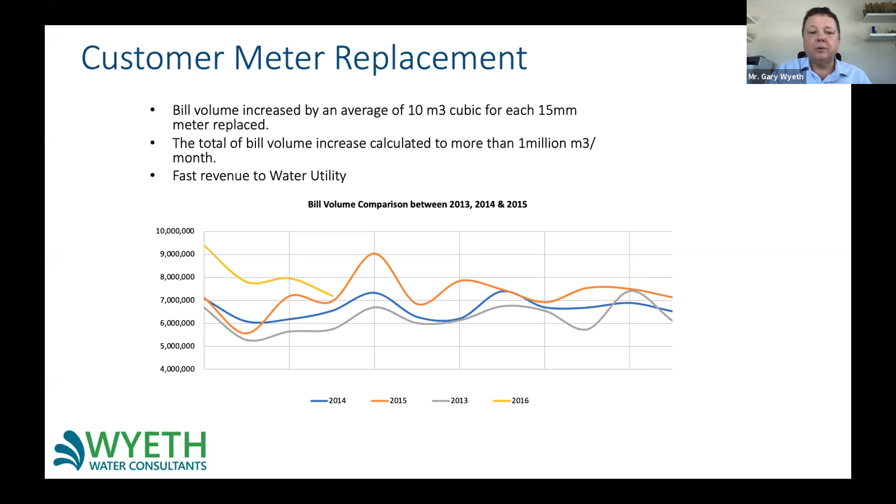This is actually a contract that was undertaken in Malaysia for one of the utilities. You can see here that the revenues on a year-to-year basis are actually increasing, from 2013 up to 2014, 2015 up to 2016. This increase, going on a year-by-year basis, was actually down to customer meter replacement. So those customer meters that were being replaced were actually seeing an increase in revenue going to the water utility.

Now that increase in revenue is something we're looking at because it's often what we call the virtuous cycle. As our revenues increase, we can spend more of that money. So that increased revenue can be used to invest in further NRW programs, maybe pressure management, maybe protection, or even more meter replacements. And that will help to reduce the NRW even further, which will then give us more revenue or decreased operational costs, which will then improve the water utility's revenues and profits.

That's what happens, utilities work in this circle and they gradually improve, which is why a lot of non-revenue water programs take a long term - they can be 10, 15, 20 years. Utilities like Selangor have been doing non-revenue water for over 20 years. Johor is 15 years, that's been ongoing and they're still working at it now. So this is something that's not going to happen quickly.

Now, the issue that we have with holistic programs is that often they can only be limited in length, maybe 3, 4, 5 years. So because we're looking at that longer period, it is the utility that needs to take over once the shorter holistic program has finished.

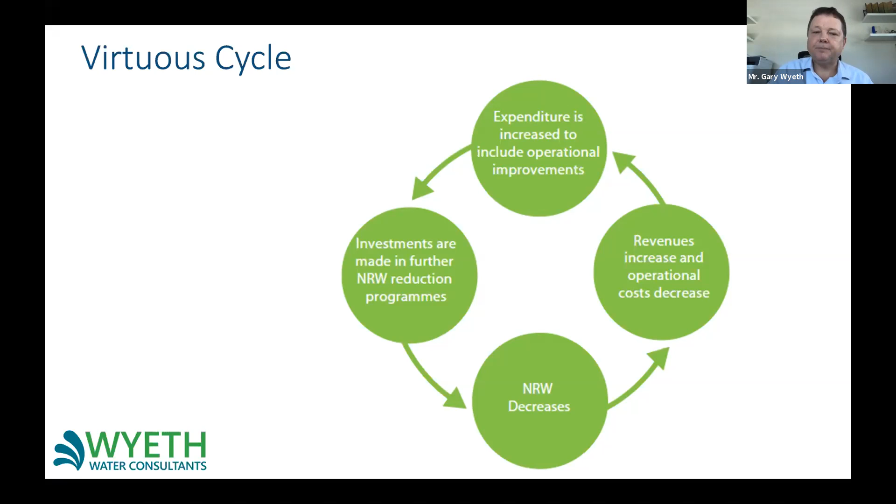So this means that the government, either at a state level or a federal level, has to subsidize these utilities to be able to cover their costs. Now this can be done for political reasons, because you want to keep the people happy, or you don't want to increase the water rates too high. But if that's the case, there needs to be a fixed subsidy so that the water utilities know exactly what they're going to be getting on top of the revenues from their metering.

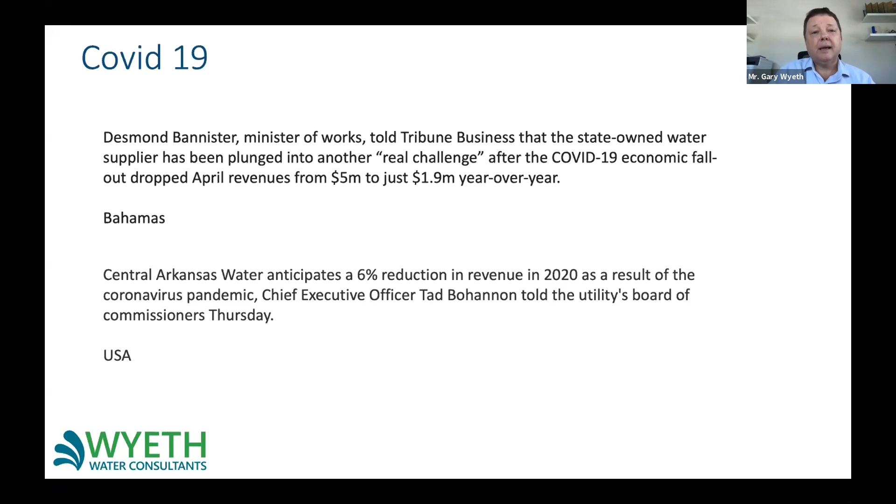So what's going to happen there? Are the governments going to have to subsidize that loss that's happened over that period of lockdown? And how do the governments actually work out roughly how much it is? Or do the utilities have to start looking at cost saving measures? Do they have to say, okay, we've lost 6%, 7%, 8% of our money this year, so we're going to cut down some of our programs? And probably NRW would be one of the programs they'd look at and say, well, maybe that's not so critical.

But fortunately there are people out there who believe that this situation, where you actually have lower revenues coming in, is an ideal situation to boost the non-revenue water activities, because they're the ones that are going to help you increase your revenues further and also decrease your operating costs, especially if you have a lot of repairs that need to be done or mains replacement.

Hopefully, once we've got through this year and we get into next year, we'll be able to start getting back onto normal footings.

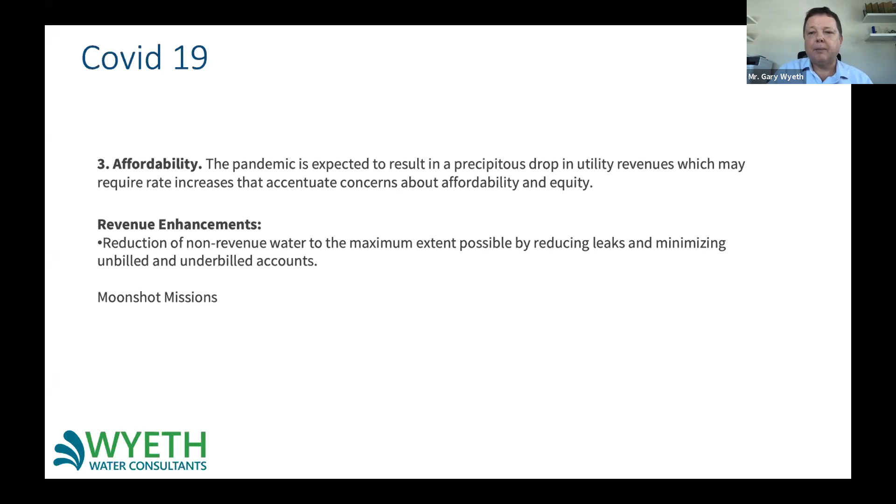Meter reading errors, so people reading the meters, accounting errors from your billing systems, meter under registration, and water theft.

Fortunately, in Malaysia, I think nearly every water utility uses handheld meter reading devices, which means that meter reading errors are almost zero, which is good. They then use those handheld devices back to the office, and all of the data is sucked into the billing system, so accounting errors are almost zero. And even water theft is quite minimal here in Malaysia.

So really, meter under registration is probably the major issue that we have in terms of commercial losses, which are affecting the revenue of your water utilities. And the big factor that we have is actually meter accuracy over time, so as meters get older and older, they actually wear and tear, and we need to replace those meters.

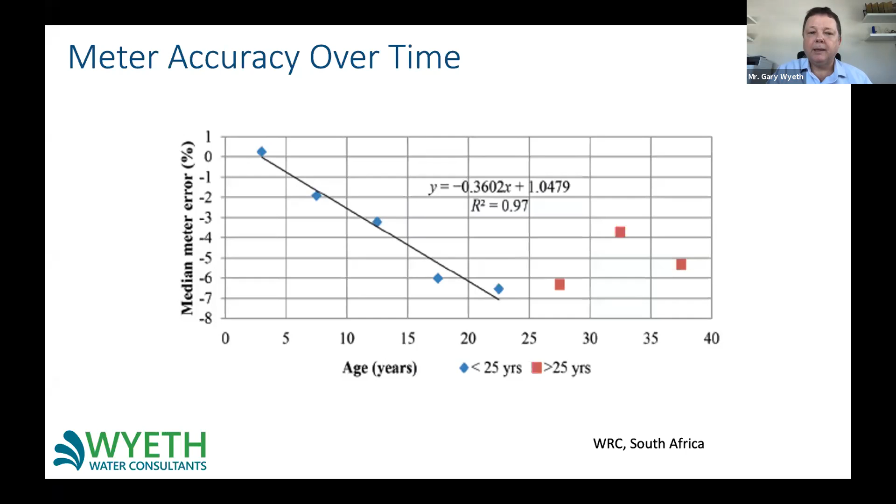But once you've set that target, you need to make sure that you are replacing meters once they reach that age, whether you think they're still accurate or not, because they could drop off very quickly and lose their accuracy.

And of course, when you are replacing those meters, you need to make sure that you're replacing them with good quality meters that are going to last a long time and are not going to start failing very quickly within the first 3, 4, 5 years. So cheapest is not always best. Make sure that you're buying a good quality meter and that it's being installed accurately.

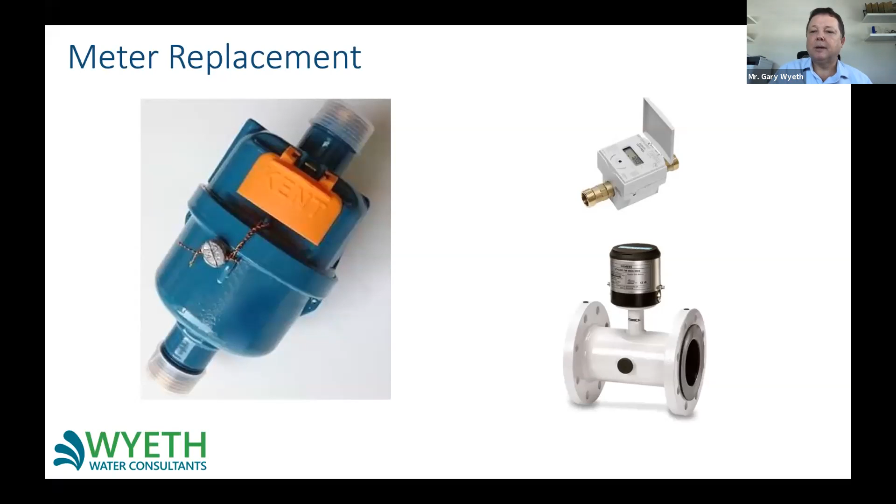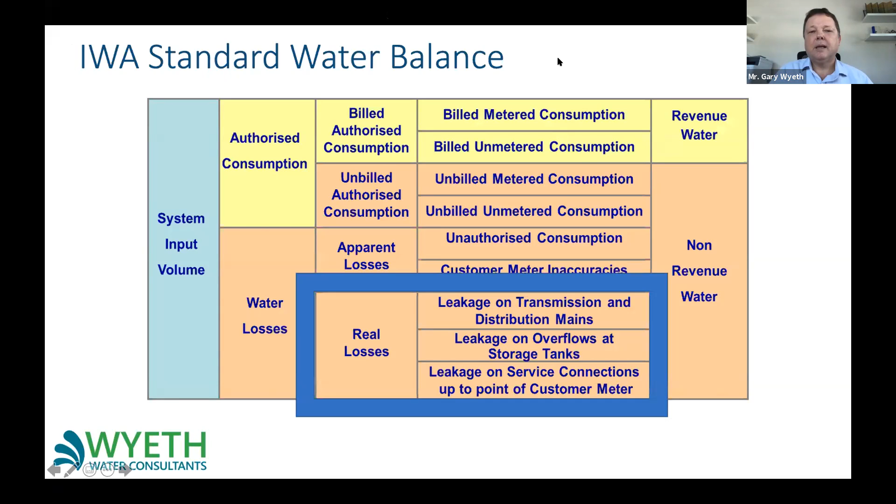Now, going back to the water balance, the other major component of non-revenue water that we have here in Malaysia is actually physical losses, and those physical losses are the thing that we need to concentrate on the most.

We have active leakage control, speed and quality of repairs, asset management and pipe replacement. And I'm going to talk mainly about those three, because these are the things that utilities need to really concentrate on once the holistic programs have been completed.

The holistic NRW programs are basically going to get the monitoring situation in place. They're going to replace all of the customer meters. They're going to set up DMAs so that we've got flow going into different areas, and we're measuring each DMA and understanding where we have physical loss problems.

And the holistic programs are going to do pressure management in most cases, set up PRVs and put on advanced pressure management on some of them. So in this presentation today, I'm not going to talk much about pressure management, but I'm going to concentrate on the other three.

These are the main three that the water utilities need to do as a continuity after the holistic programs have finished.

So let's start with active leakage control. Leakage is a problem for all utilities. It doesn't matter how low or how high your non-revenue water levels are. Leakage will always be there, and you'll always be having new leaks or bursts happening on a weekly, if not daily, basis.

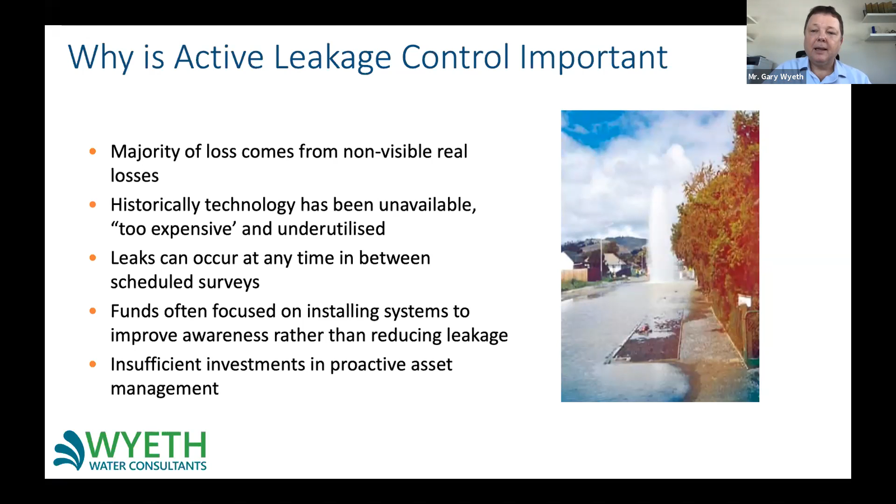Now, leaks can happen and be left unknown for weeks or months, depending on how much work is done by the utility to actively look for those leaks. And if we don't have sufficient leak detection teams and activities going on, what we will see is that the levels of leakage will start creeping up, especially after the holistic third-party contractors have left.

Now, if we look at leakage itself, we tend to break it down into 3 different types of leakage. We have reported leaks, also called visible leaks. These are leaks where the water comes to the surface and you can actually see the leak or where it's coming from. We call it reported because generally somebody, either the public or utility staff, will report that leak or phone in on the hotline to say there's a leak. Then we have unreported leaks.

These unreported leaks are the buried leaks. These are the ones that are invisible, where the water maybe just seeps down into the ground or runs away in a river or a drain. And the only way that we can find them is to do active leakage control.

And then we have background leaks. Background leaks are the very small leaks, like weeping joints or very small pinholes, that are basically not cost effective to find and repair. The only way to really address background leakage is to do pressure management or mains replacement. So what we're really concentrating on are the reported leaks and the unreported leaks.

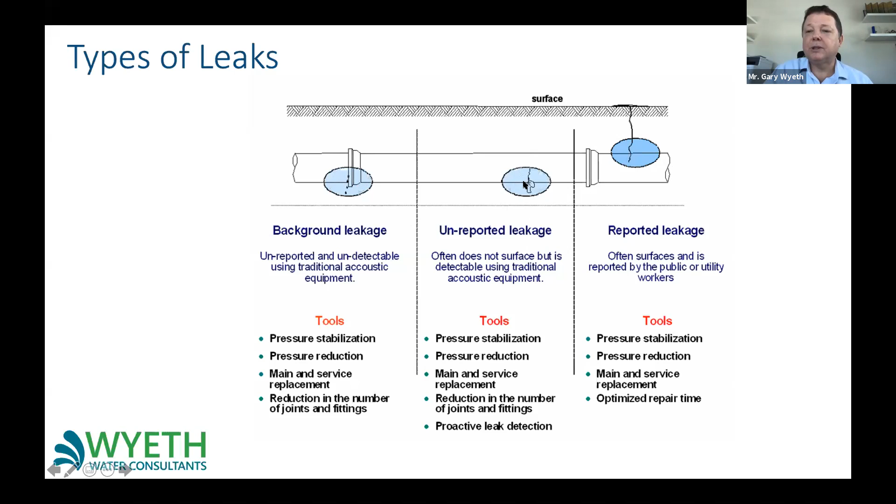And it's generally known that for every leak that is visible, there are 4 or 5 buried leaks, unknown leaks that are underground that we need to find using our active leakage control.

Visual inspections are probably the most basic way that we can look for leaks, especially these visible leaks. And these are fairly easy to spot because just by walking around or even driving around, you should be able to see these visible leaks.

And as I mentioned, we also get calls coming in from the hotlines from people reporting these leaks. This is not what we would call too active - it's just reactive. So as soon as you see the leak, or somebody reports it, you go out and fix it.

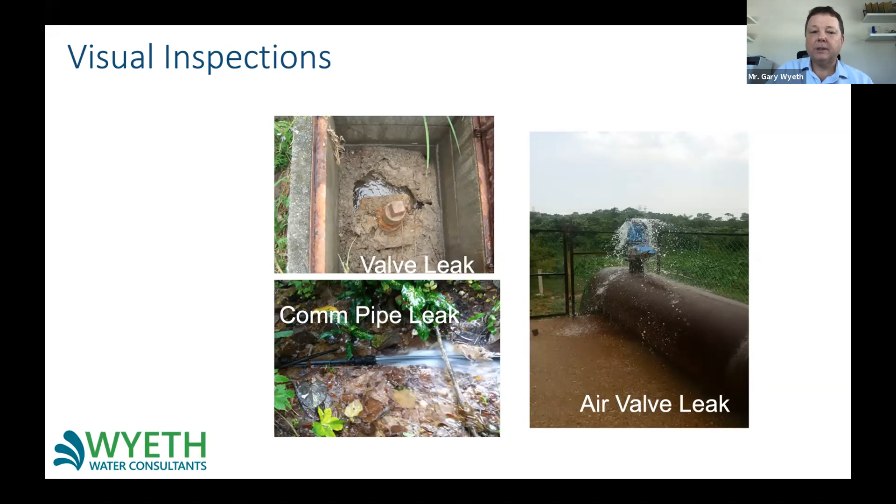Now for those buried leaks, those are where we need to start using equipment. The basic way is to use basic sounding. So we have listening sticks, just mechanical sticks. We have electronic sticks that amplify the leak noise. And we have ground microphones.

In this technique it probably doesn't need too much skill, but it still needs a bit of training. People need to be walking large areas of a zone. So first of all you need to identify where you think you have a leakage problem, and this comes down from your DMA monitoring.

From your DMA monitoring you might identify a DMA that has an issue. You can then do step testing to break that down further into a small area. And then you need to go out and start sounding on any fitting you can find - a fire hydrant, an air valve, a washout, a customer meter, anything where you can put your devices on and start to listen for the noises.

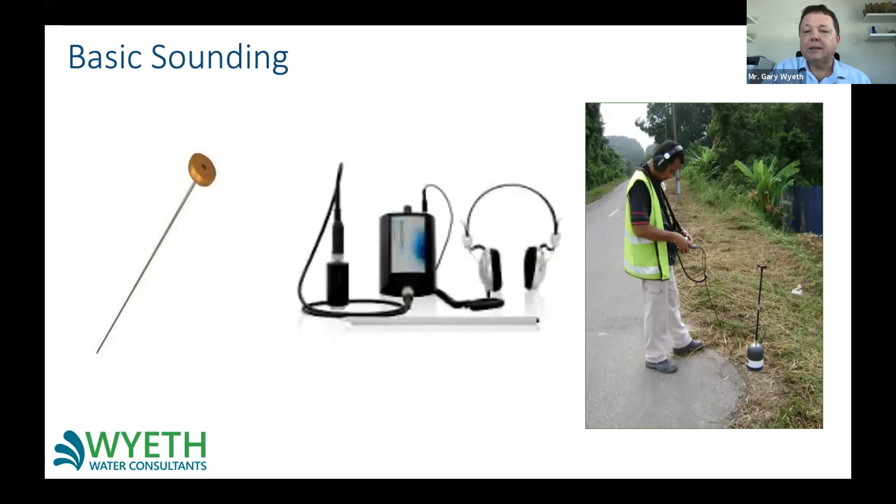Also with ground microphones, if the pipe is not too deep and the ground conditions are good, you'll be able to just listen to the ground surface as well. Now these devices are not necessarily going to pinpoint where the leak is, but they're going to generalize where a leak is, and then you can move into other devices that can pinpoint it.

You could also move into more sophisticated sounding. Probably the most common one that's been used over a number of years now is leak noise logging. That's where we have these electronic devices that we install in your DMA at different points, either temporarily for a week or two, or permanently listening for the leaks.

And what these devices do is they sit there, and at night time when the background noises are quieter, they actually listen for the leak noises - either existing leaks or new leaks if you have them permanently monitored.

The latest technology, which has happened over the last few years, is that these noise loggers can also do correlating. So once they detect a leak, they can pinpoint it as well.

And obviously what you're looking at here is a ramping up of your active leakage control, because it's going to cost you a lot more money to be buying a lot of these leak noise loggers and installing them and managing them as well.

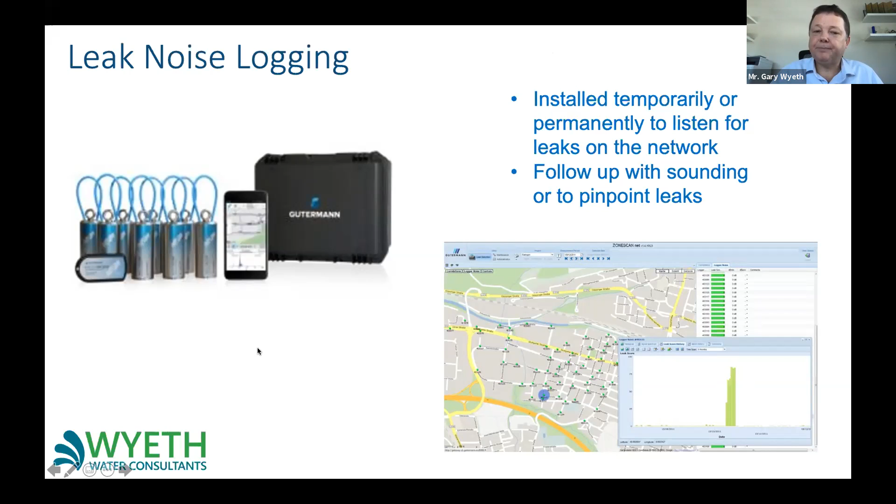And then leak noise correlators - these are devices where we can actually pinpoint leaks. If you don't have the leak noise loggers and you suspect there's an area that does have a leak, you can put these correlators on those pipelines to pinpoint the leaks and verify that there is a leak and where it is.

So when we're looking at all of these technologies, from basic sounding to noise logging to correlating, they all need a fair amount of equipment, and you also need a fair amount of staff and skilled staff who know how to use this equipment.

And probably more than the skills, you actually need staff who are dedicated to what they're doing. They need to be people who you can send out and tell them there are leaks in this area, and those people would go out and really look for those leaks - not just do a half-hearted job and come back and say we couldn't find anything, even though you know there are leaks out there.

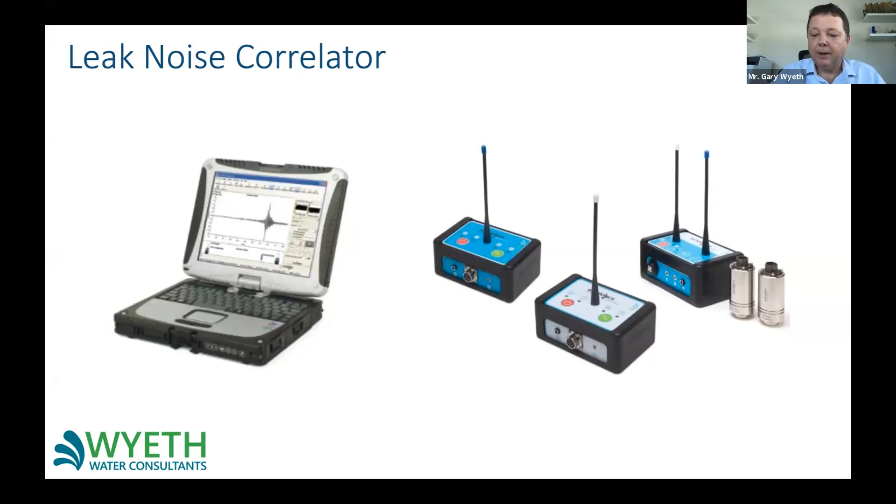Now, large diameter mains is quite interesting, because most holistic contracts that have happened in Malaysia have concentrated on distribution networks, looking at DMAs, doing pressure management in DMAs, doing leak detection and repair in DMAs. Very few, if any, have looked at trunk mains.

I think the only utility that's really looked at it is Air Selangor, and they've done a real massive program of their trunk mains. They've actually been very successful, and they found a lot of leaks on their trunk mains. This doesn't mean that their trunk mains are more leaky than anybody else's. I can guarantee that all of the trunk mains across Malaysia and all the utilities will have a lot of leaks on those trunk mains.

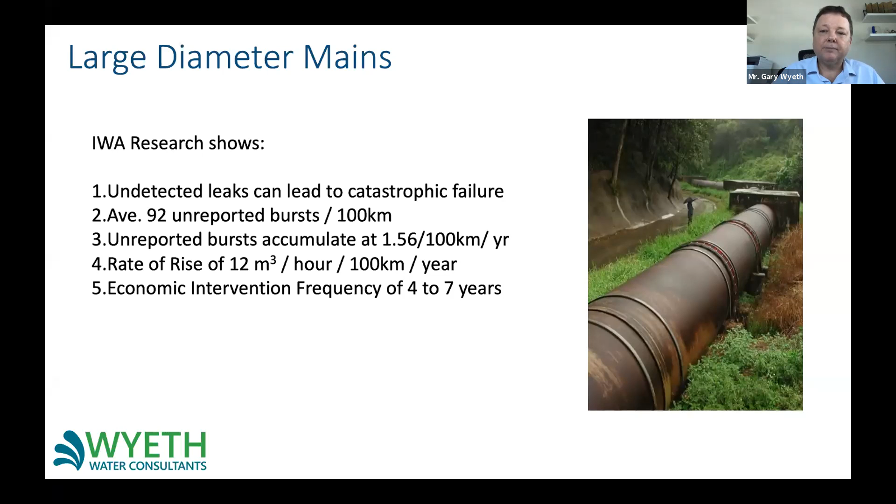And what makes it worse is that these trunk mains tend to have higher pressures, and they also tend to be made of a stronger material, metallic material. So when they do fail, when there is a leak or a burst, at that high pressure and that sudden failure, you can actually have a lot of damage that's done not just to the pipelines, but also to the surrounding area. And what makes it really critical is that there's often a lack of redundancy.

I remember when I first started for a utility in Malaysia in 2003, my first day of work, I walked in and there was nobody there. I said, where is everybody? And they said, oh, we've had a major trunk main burst. That burst took out a large area of the district it was in, and it probably took about 4 or 5 days for it to be repaired and for it all to be back up online and for the pressures to be back up there.

So trunk mains are an area that utilities should be looking at. And if you are developing holistic programs for the future, make sure that trunk main leak detection is put into those holistic programs. I can guarantee you that it will be successful.

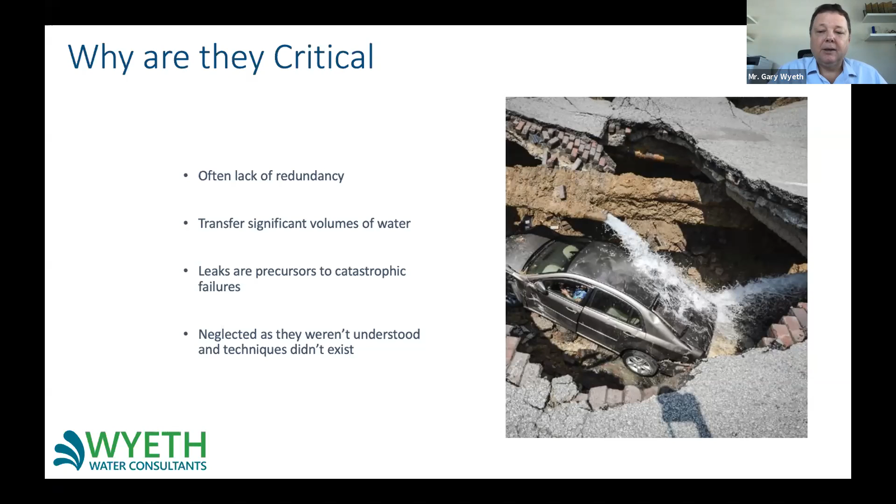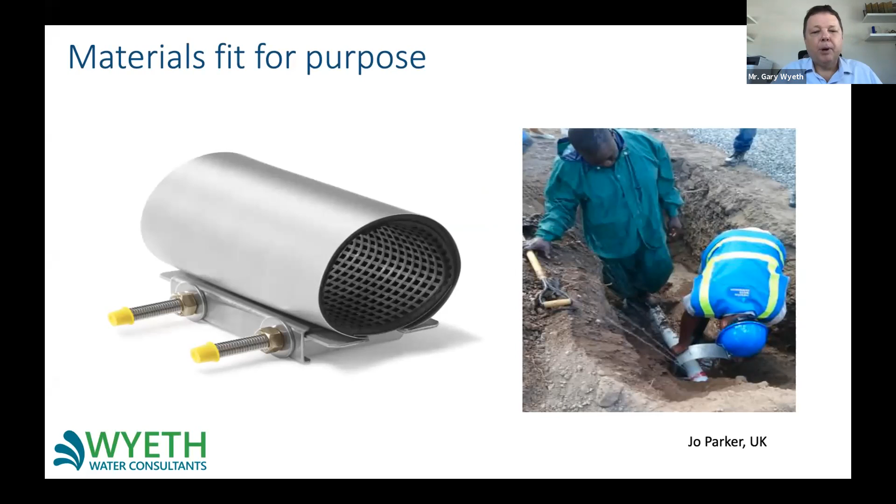Now, repairs. It's essential that when we do repairs, that we actually use proper materials. And I think in Malaysia, most utilities do try to use the proper materials. Maybe people don't tend to use repair clamps, but maybe they use these couplings. These couplings would be where you would cut out a piece of pipe where you have the leak, the burst or the crack, and then you put couplings in.

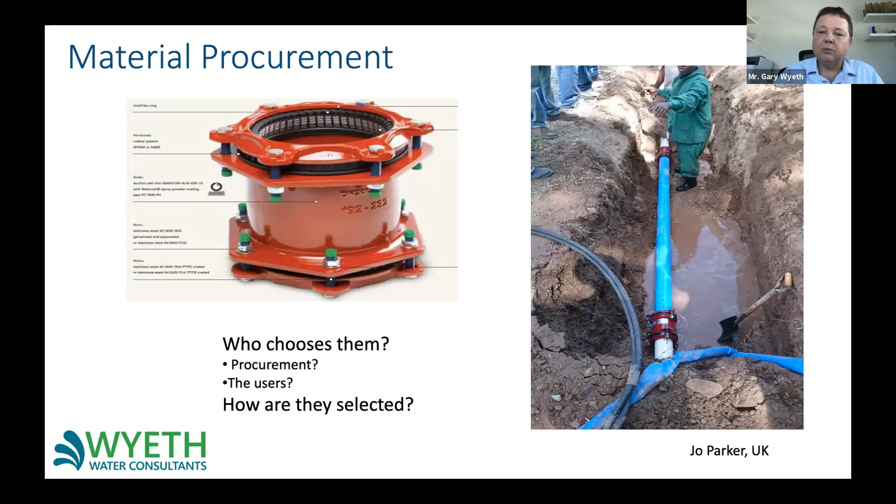But what's key is that you procure the right materials, making sure they're good quality, making sure that they're going to fit for the right pipe size and the right pipe material, so that you're not going to have problems with those couplings failing either from the material not being good enough or for them not being the right size. So procurement of the materials when you're doing these repairs is critical as well.

And here's an example of a poor repair where you can see that somebody has actually cut out the road and they've dug down, and I would assume that they've made a repair and then reinstated it or covered it back over, but it's still leaking. Or maybe it's not still leaking, but it started leaking again. So making sure that when you do a repair, you do it right the first time and you do it properly the first time is key as well. It's a key part of your work to make sure that you're not going to have a backlog of repairs that just keeps on growing.

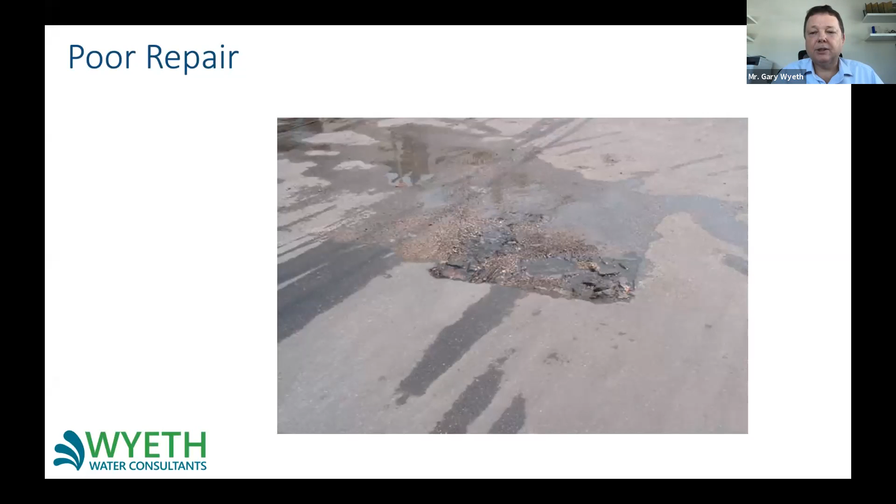And talking of backlogs, you can see here that this utility, it's not in Malaysia, you'll be happy to know, has actually mapped out all of the leaks that have been detected, and it's put all of those leaks onto a GIS map. All of the green dots that you can see are actually leaks that have been repaired. The red dots are outstanding leaks, leaks that are waiting to be repaired. So you can see there that they have a huge backlog of leaks waiting to be repaired.

And if you are a non-revenue water or leakage detection person and you find a leak and then go back there months or even years later and it still hasn't been repaired, it's very disheartening and it makes you think, why do I bother finding these leaks? So getting leaks repaired as quickly as possible not only reduces your leakage volume, but it also helps with the motivation of your staff who are actually doing the leak detection.

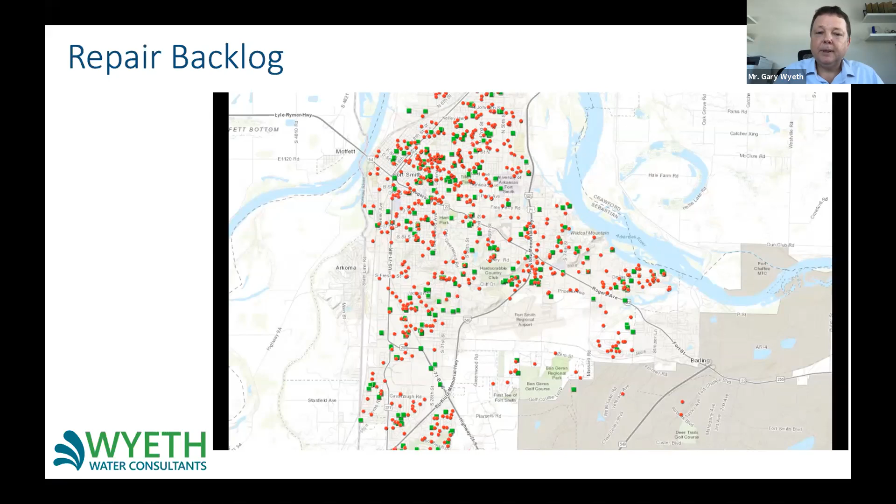Mains replacement is probably one of the key factors of any utility's non-revenue water management. That's because as pipes get older, they get weaker, eventually reaching a point where they're too weak to sustain the pressures we're putting them under. The problem is utilities don't invest enough in mains replacement to keep on top of pipes in poor condition.

When I go to a utility, I always ask what is the life expectancy of your mains. People will tell me what they believe their pipe should be - 30 years, 50 years, 80 years, or some over 100 years. I know in many countries they have pipes over 100 years old, some 150 years old. So when people tell me their pipes will only last 30 or 40 years, it seems a shame - you're spending a lot of money on an asset that won't last as long, when if done properly it would last much longer.

If we look at replacement, assuming a life expectancy of 50 years, you need to replace all those pipes within that time. So if you have 10,000 kilometers of pipe, you need to replace 10,000 kilometers within 50 years. So that you don't build a large backlog at the end of those 50 years, you need to replace on average about 2% per year. If you drop below 2%, you'll start building that backlog, and by year 25 or 30, suddenly you've got 60-70% of your pipes failing.

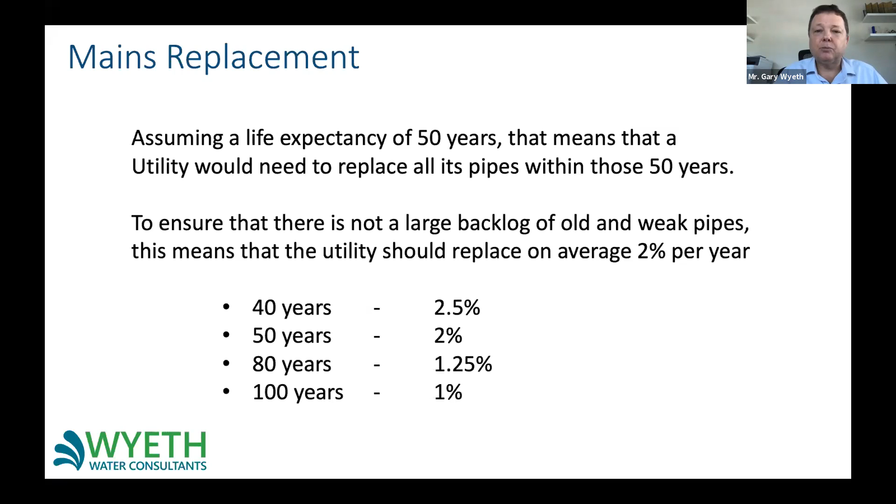Of course, if you can extend the life expectancy of your pipes, that means you only have to replace a lower percentage. If you can get your pipes up to 100 years in life, you only have to replace 1% per year, which is a much better situation than replacing 2%.

So how do we increase the life expectancy of our pipes? There are really two options. One is to install good quality pipes using a good construction method from initial installation. Unfortunately, I don't believe that's done in Malaysia in many utilities. The installation of pipes, especially at distribution level, is done very cheaply, often by developers building housing areas using not very good standards of construction, and this leads to many problems later on.

Or, and this is what most utilities do, they wait until the pipe is in a weak state, sometimes after 20 years, and start pressure management - dropping pressures really low to reduce leakage volumes - and start leak detection and repair in a sort of firefighting role. I remember working at one utility where some DMAs would have 40 to 50 leaks every month. It didn't matter how many you repaired, the next month you'd have 40 or 50 new ones. That's the sort of situation where you know your pipes are just gone and you have to replace them, whether they're 20, 30, or 40 years old.

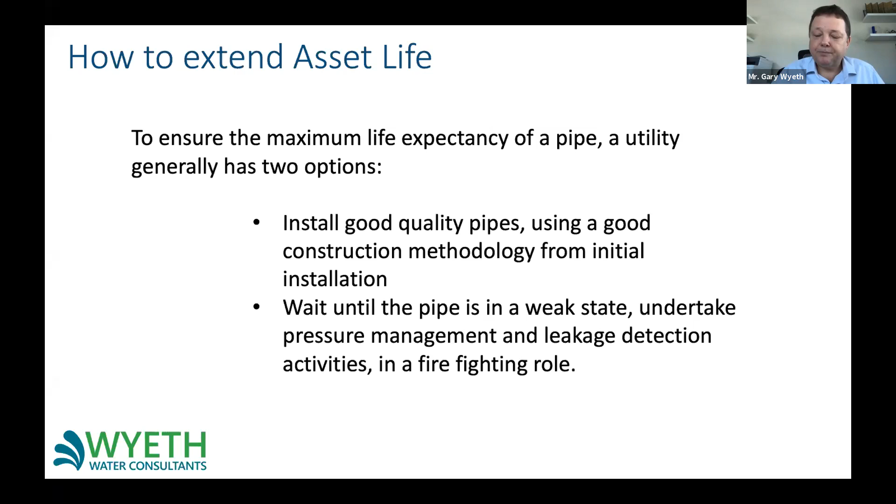The sort of things you need to be looking at: how do we make our pipes last longer? Storage. Before you even put the pipes in the ground, they need to be stored properly.

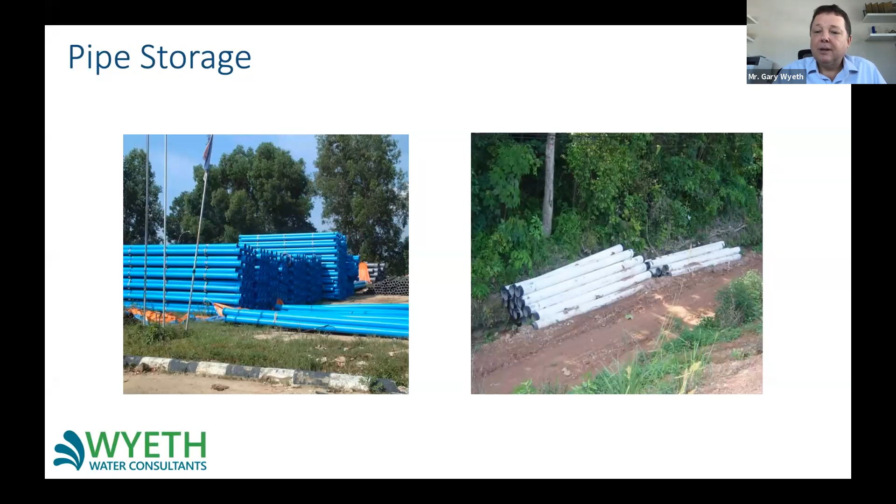On the left-hand side, we've got PVC pipe just lying out in the sun. That means the PVC pipe is going to bake and become brittle. When you put it in the ground, any pressure on the pipe, from soil movement or rocks pushing on it, is going to crack it and cause a leak almost immediately. On the right, you can see these mild steel pipes piled up on top of each other in a ditch, and you don't know what condition they'll be in.

Well, we do, because I've got some pictures. You can see ends of pipes that have been bashed in, and pipes that have been lifted off the lorry using chains without protection, where the coating has been ripped off. Do you think the contractors installing these pipes threw them away, saying they're not good enough quality? No, they would have quickly put them in the ground, knocked out the dent, welded it together, covered it up, and said that's fine. But within a matter of a few years, we're going to start to get leaks on the joints, and also leaks where we've got bare metal touching the soil.

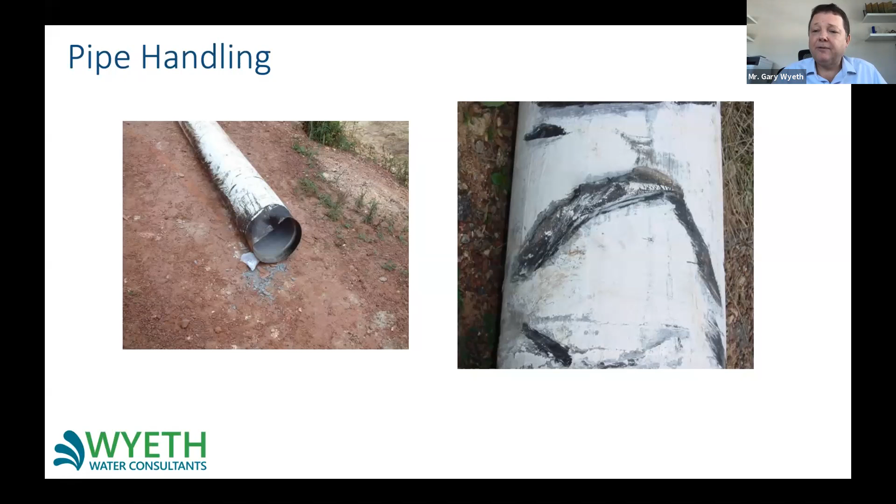So ensuring that you store and handle the pipes properly is the first step. The next step is actually protecting the pipe for its whole life.

The best way of doing that is to have a surround around the pipe of nice soft material. We call it granular fill, but quite often this would be a sandy material. We'd put out a bottom layer of sand and compact it to get rid of any air in it. Then we'd put the pipe in, backfill with more sand and compact it again. Then we can put all the material that was dug out of the trench on top. And then we put on a final layer if we're going to be putting a road surface on top. If not, you could use the dug material all the way up to the top.

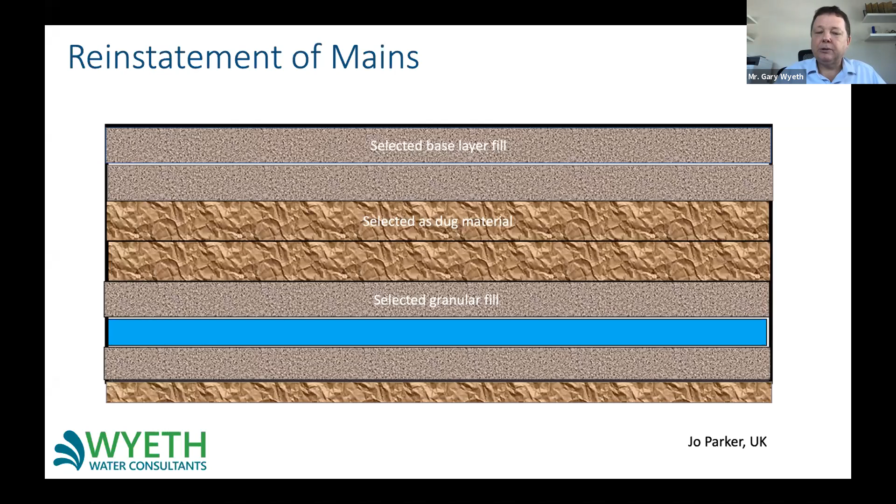What I often see in Malaysia is people put the pipe onto the bottom of the trench, and then the dug material is just dumped straight on top, which means you've got hard material pushing against the pipes. You're also going to get large air pockets, and as soon as rain starts to get in there, you'll get ground movement, the pipes will move, and the joints will start to leak. So there are lots of issues that can happen if you don't have a properly compacted sand surround for your pipes.

This is something that I believe all pipe or mains replacement projects should be doing in Malaysia, if they're not doing it already, to ensure that your pipes are actually going to last 30, 40, 50 years longer than they currently are.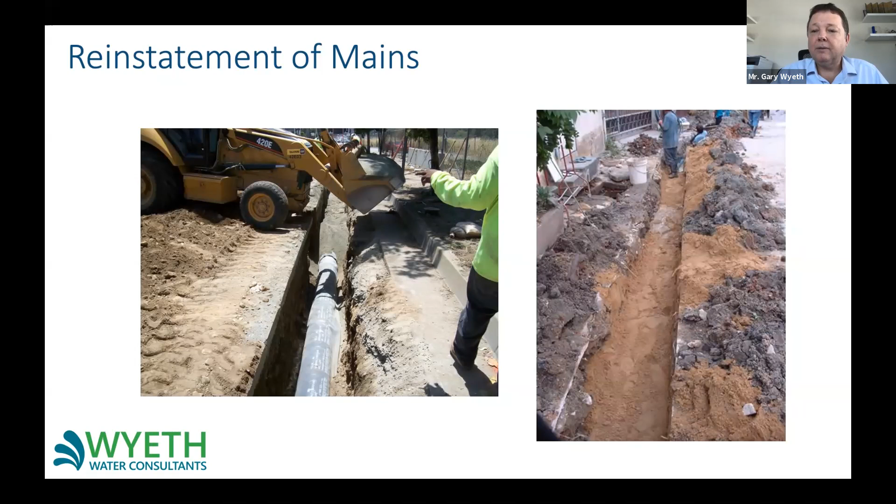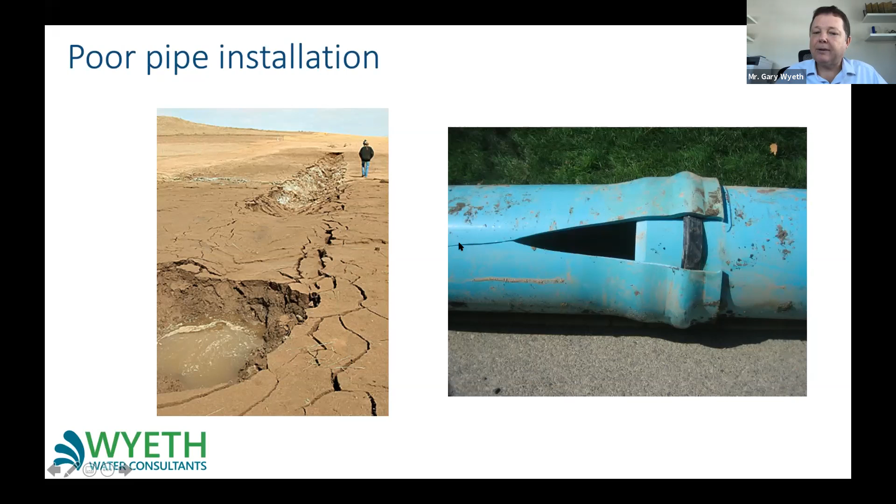Penang, as I mentioned at the beginning, are doing it in-house. Air Selangor have now taken over from the third-party contractor before and are doing it in-house. And the same with Malacca. They had a third-party contractor and they're now doing it in-house.

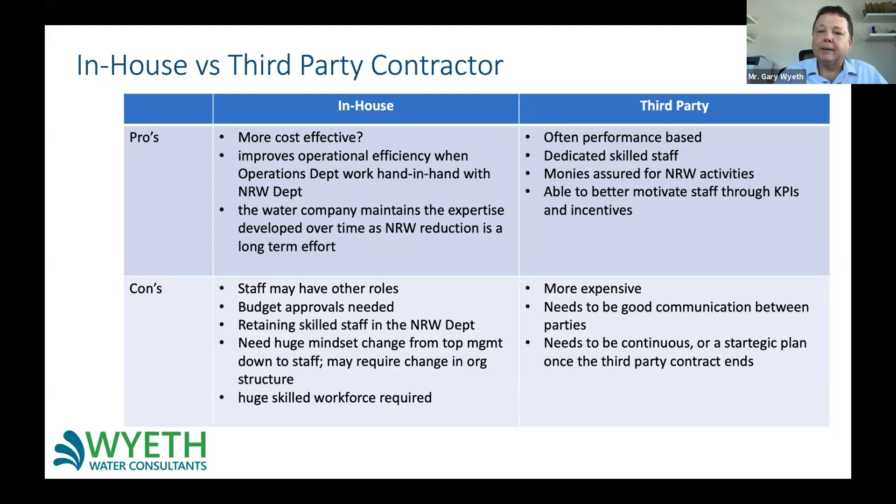So all three methods have actually shown good results, which just indicates that no one method is the right way to go. All three methods will work if you have the right management - the right management who believe that NRW is critical and that it needs to be brought down.

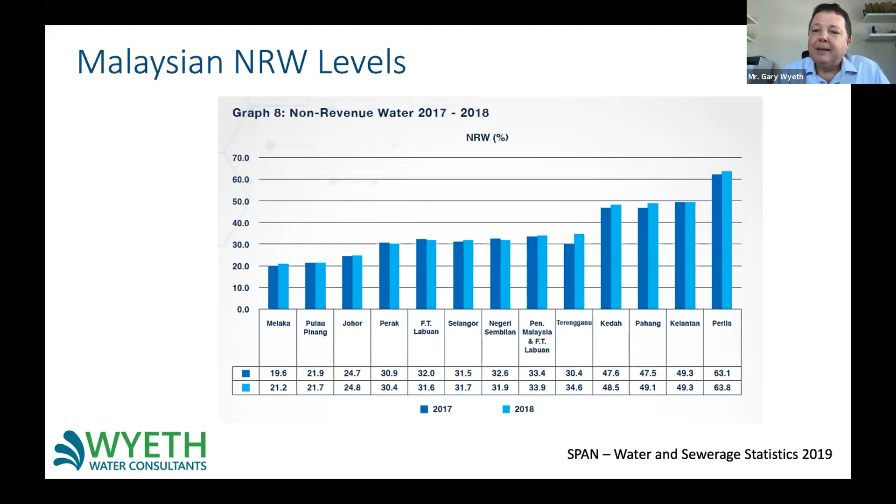So the challenge that we have for NRW is that it needs to be looked at from all departments. Setting up an NRW team with maybe 10 or 20 people, or less, is not going to help you reduce NRW, especially if all the other departments, like billing, operations, and production, can say, 'oh, NRW is the NRW department's responsibility.' You need to have a proper strategy, especially if you're doing it in-house, to make sure everybody understands that it's everybody's responsibility. That's quite often why the first step of any in-house NRW program is to have an awareness program.

And that awareness program needs to be for every single staff member. Every single staff member needs to know: what is NRW? Why is it important? And how can I help to reduce it?

But it all comes down to being a management problem. And when I say a management problem, I'm not necessarily saying the utility's management, but even higher than that - the board and the government. Everybody needs to look at this and make it a major priority, which includes the financial side of things, so that there is enough money to ensure continuity. There is motivation for everybody, from the staff down that are doing the work, up to the top management, who are the ones giving direction to the utility.